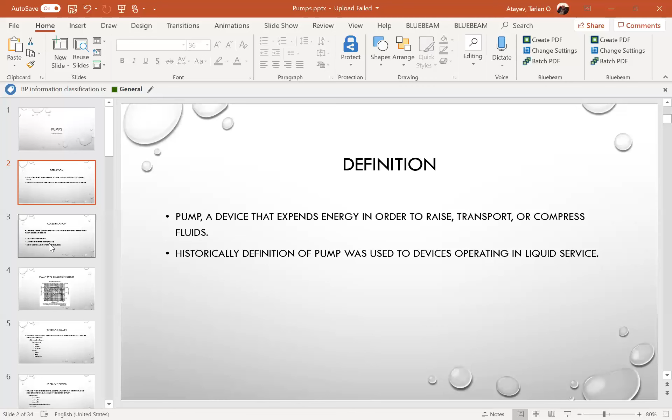General classification of the pump. The pumps are generally classified into three methods, mainly based on how energy is provided to the liquid.

One of them is volumetric displacement. Another one is addition of kinetic energy. And the third one is use of electromagnetic force, for ionized liquids. We will not be discussing this third method because I've got limited knowledge, and actually it's very specific stuff.

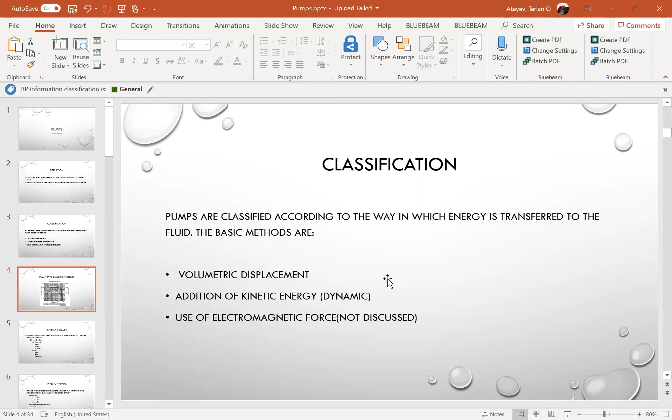Before going into the types of pumps, for the detail on the first two methods of energy provided, I would like to show you the pump selection chart. It shows dependence on head and capacity.

This is main stuff, because during interviews, I'm asking how you would choose a pump - what type of pump needs to be installed. Each company, each technical book is different, because pump selection is not very easy. There are so many factors affecting the pump selection.

It's usually not very easy, but this is just something like a starting point for pump selection and pump system design.

This is a pump chart. Again, different companies and different books provide different charts. From this chart, you will see that for higher flow and lower pressures, usually centrifugal pumps are used. And for higher head but lower flows, multi-cylinder plunger, positive displacement pumps are used.

But this is not a must, because I know a lot of centrifugal pumps which operate at high head and low flow sections, and backwards there are a lot of positive displacement pumps which run at low head but high flow. These are special cases, not standard cases.

There is some selection carried out by the companies themselves, so it's just the willingness of the companies who are installing the pump. But generally, these charts are perfect for initially identifying what pump you would like to use.

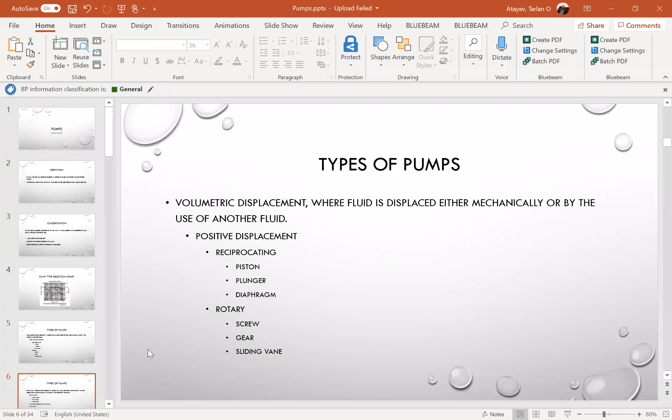And at the same time, dynamic pumps are ones where kinetic energy is added either by rotating at high speed or by providing impulse in the direction of the flow. There are three main types of pumps. One of them is centrifugal, which includes radial flow, axial flow, and mixed flow, and many others as well. It's not limited to this one.

And peripheral regenerative turbine pumps - there is very limited use of these. Usually they can be used as positive displacement pumps because they generate quite high head and very small flows. But actually their use is very limited, so you will not be finding a lot of stuff around, and they are not very widely used.

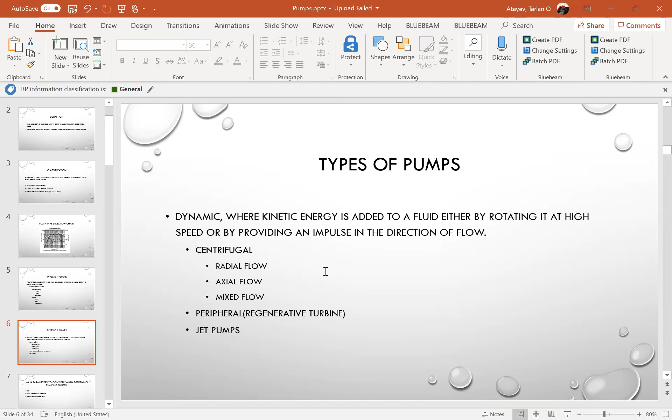And the last one is jet pump. Jet pump is sometimes classified as a third type of pump. I will be giving some tips around jet pumps. I will not be touching too deep, but I will give some information about these pumps as well.

When you are starting to design the pump, the first thing that should come to you, and actually the easiest choice, is centrifugal pumps. They're quite robust, very widely available. They can be designed in various ways, applied to high pressures, applied to small flows. There are high-speed pumps, low-speed pumps. Any type of centrifugal pump is available in the market you can use, and it's the beauty of centrifugal pumps that they are very well known and very well designed - there is a lot of knowledge behind these pumps.

Let's say, for example, there are high-speed centrifugal pumps running with very low NPSH. Especially in Azerbaijan - currently it's changing, but previously there were water injection pumps installed on platforms. In Azerbaijan was the biggest in the world - the biggest centrifugal pumps installed in the world, not only in size but in terms of pressure, because it was used for water injection into the reservoir, and in terms of volume as well.

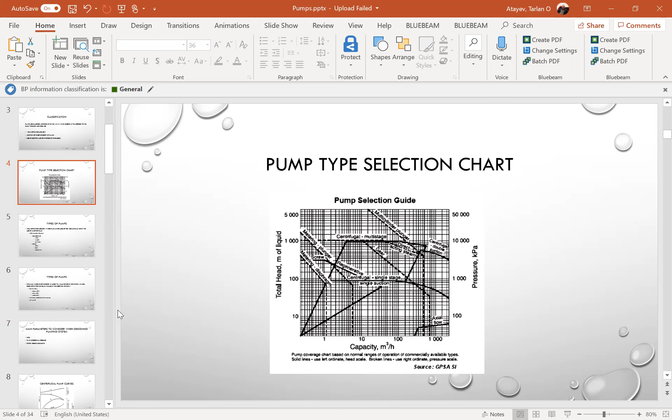And when you are starting designing, you should start from the system resistance curve. Just - what head do you need? For example, differential pressure head - what head do you need to pump liquid from one separator to another, from one equipment to another? What's the distance between them? You are putting the line, you choose the place where you put the pump, and when you are putting the line, you will see what the system resistance on the pump is.

How much head do you need to pump this liquid from one point to another point? The curve is dependent on what flow you are putting. For example, at 10 cubic meters, head of 20 meters is required, and at 100 you need something like 25 meters required. You put this curve, and according to this curve, you start designing the pump.

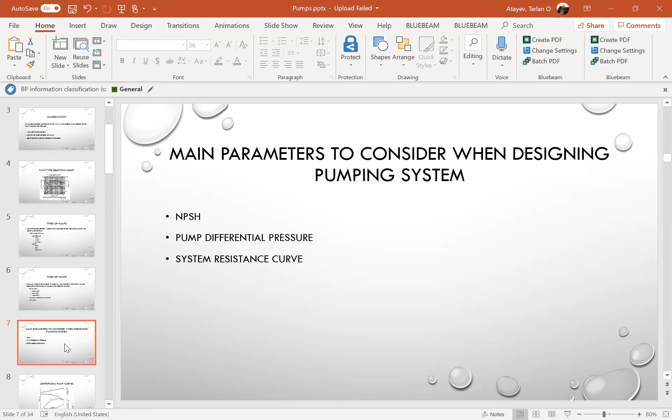Unfortunately, I don't have all my information, all my books, all my notes, papers are left in the office, and I just use everything which is in this presentation that I took from the internet. To be honest, the internet is not a great place to get this. It is a great place, but I was struggling to get the information which I wanted to share with you. But some of it will be appearing in this presentation.

Again, I would like to inform, because it's traditional stuff, it's something like scientific. Traditionally, pumps were designed with all formulas referring to water, and when the pump design is completed, the pumps are usually tested at the factory, and the widest available and most easy liquid is water. So all curves which you can see from the pump manufacturer are based on water.

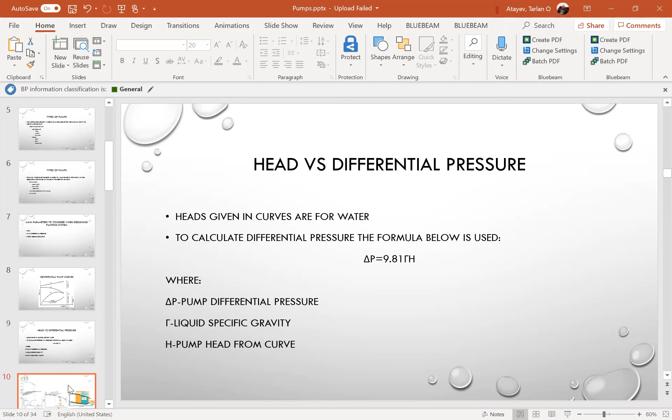Now I'd like to go to, let me check 2 presentations. Recently, I wasn't asked, but I was discussing with another process engineer, how is it correctly and properly right to start and operate the pump.

On the pump curve, you will notice a lot of enormous information. Let me go a little bit back for the NPSH. One of the main things is NPSH required. NPSH required is a head required for the pump for proper operation, mainly to prevent cavitation.

Why does the preferred operating range matter? Because there is an allowable operating range and a preferred operating range. What's the difference between allowed and preferred?

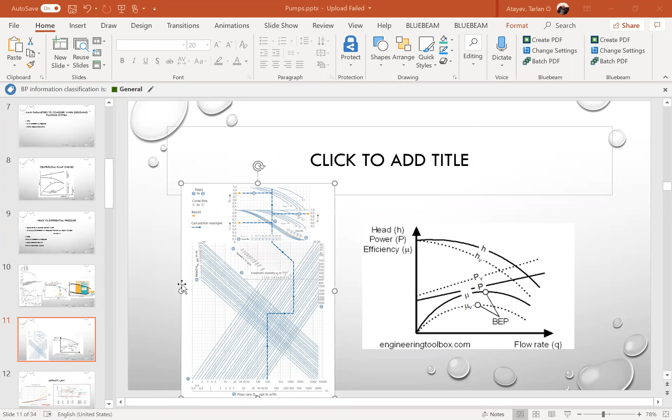Affinity law - it's one of the main topics. Generally I would like to go on. Let me return to this slide. Just a few days ago I was discussing with another process engineer the possibility of starting and

stopping the pump with the discharge valve closed. Generally there is no problem - a lot of companies do this, they just don't have a minimum recycle flow on it, and they're just closing the discharge valve of the pump. They start the pump, and later they open the discharge valve. Same during the stop - they close the discharge valve and stop the pump. But this is really not a preferable case.

There is no big problem, it will not damage your pump, because your pump will only be running for a few seconds, let's say 20 to 30 seconds, with a closed discharge valve. But actually you can put your pump in the low flow cavitation area, and this will reduce your pump life dramatically.

So in any case, it's better to start the pump with the recycle valve open, to adjust the flow to the preferred minimum limit of the preferred operating range, and later start the forward flow. This is something which came to my mind, and I wanted to share this case with you.

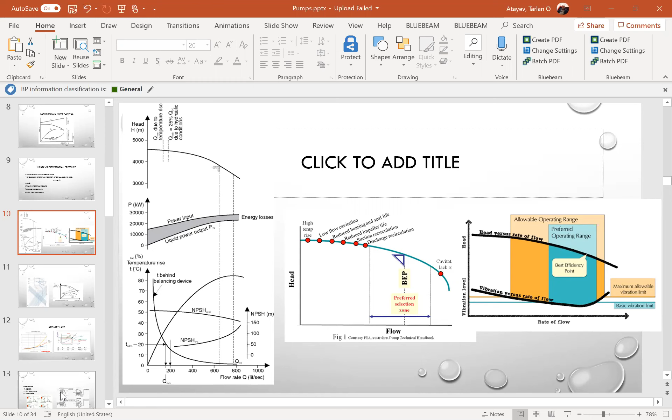Pump control - I would like to speak about pump control. There are 4 main methods. There are a lot of methods for pump control, but actually 4 main methods.

So we're calculating for the suction pump, not for the whole process? No, we're calculating for the pump itself - we're calculating for the whole process. We're calculating the head of the pump, and how much the performance of the pump due to viscosity will be slightly different, including the system resistance curve as well.

Pumps are controlled in 4 basic methods. There is another one - there is an enormous amount of valve control stuff, but the main one is throttling. A throttling valve is usually installed on the pump discharge, and you can just close or open the valve slightly more or slightly less.

And this is most efficient - no, I'm wrong, it's not very efficient, but actually this is a simple and, as they say, easy solution for them. In efficiency it's better than bypassing, but actually this again should be avoidable. This throttling is very widely used in refineries, and actually in offshore and onshore, upstream and midstream as well, but refineries use throttling very widely.

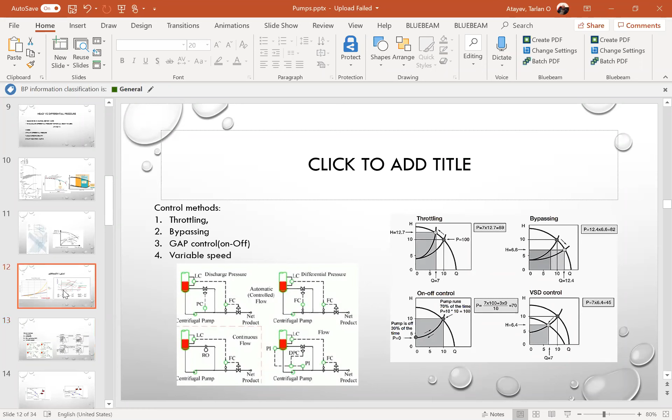This is well-investigated and well-known. When checking the performance of the pump, you should take into account the speed at which it currently rotates.

Another thing - for predicting, for example, if you're going to increase the speed of the pump, you can predict what your curve will be.

Sometimes you need to modify the pumps, and there are similar curves for different impellers, because pumps are fairly standard - companies provide one casing with 3 possible sets of impellers, and you provide your process data to them, and they choose the impeller required for your needs.

But generally, the affinity law duplicates this impeller function, and the easiest solution is to change the speed of the pump. In some cases it's too difficult, in others it's possible - for example, on one of the platforms, there is a pump.

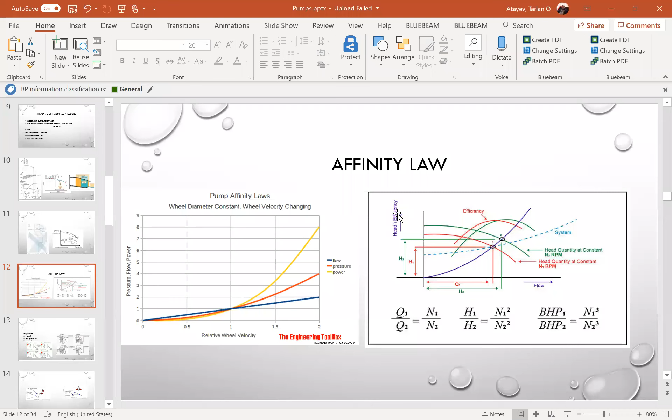Another thing you'll face quite often is pump design as parallel and series.

Series is just something like pump, booster pump, suction and main pump. And actually, the main reason is just to twice increase the pressure head.

What is the real requirement for we can design one pump, for example, instead of 2 single impeller pumps, we can have one two-impeller pump. So why do we need to do this? But in some cases, there are two process parameters controlled - suction pressure, for example. One pump is running to keep exactly the same suction pressure to not overcome NPSH, and another pump is running to cover discharge conditions, what pressure is required for the discharge line. In this case, sometimes you need physically two pumps with physically different impellers running on different process conditions.

In parallel - parallel is just physically for cases when you need, for example, 100 cubic meters, and instead of putting one pump, it would be better to put two pumps running in parallel. The main reason why is it so? For flexibility of the system.

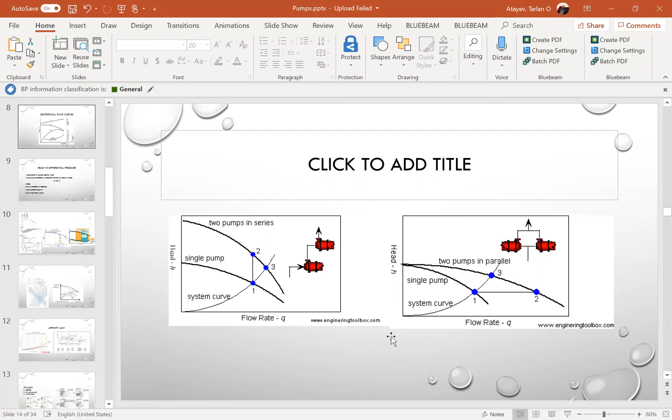NPSH, I would like to return to this - I didn't catch this a lot, I think. NPSH is just the head required for the pump to operate. But the company who is installing it wants to be sure, and there is another expression called NPSH available.

Different companies treat this function very differently, as much as they can. Even BP company used to change their philosophy from one to another. For example, some companies just add to this head another 2 meters. Some companies add 10%. Some companies add even 15% more than NPSH required. And even BP company changed this philosophy.

Your available head should be above this NPSH required at any process condition, any flow. For example, for this pump, your available head should be slightly higher than required, at least 2 meters. The rule of thumb is just 2 meters, and many companies are using this one - 2 meters. Currently BP is using 10% of the NPSH required, but I'm not sure because it's changing so quickly - I used to read the BP standards quite a long time ago.

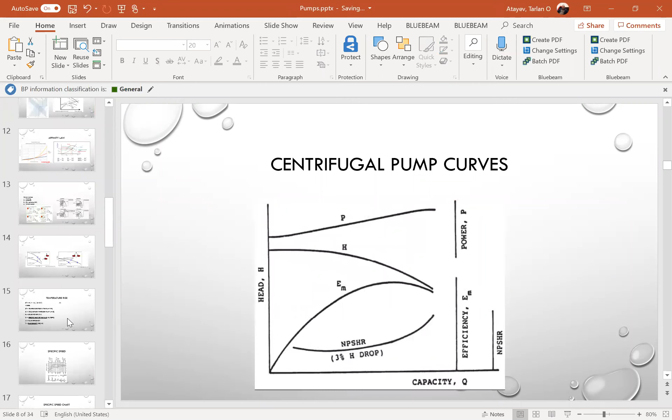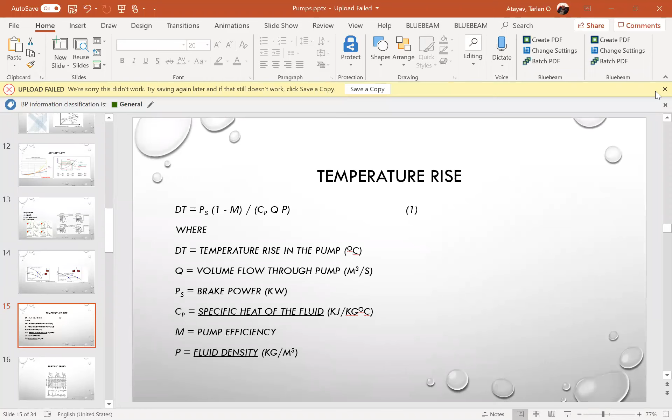Sometimes the pump adds some temperature, and especially when there's a recycle, it can go over the vapor pressure of the liquid. This is not a very rare case. It might be quite a real case, because especially with unstabilized oil coming in, it should be stabilized so the vapor pressure is equal to the pressure in the suction separator. But sometimes when the recycle turns back to the suction line and it's much hotter than the separator liquid oil because of the recycle, or even just slightly higher, it can raise the vapor pressure of the liquid and the pump will start to cavitate.

When we were specifying the process data, we specified the seawater temperature as 6 degrees C. It goes through the valve and discharges, keeping the same temperature of 6 degrees C. We did correction for the negative pressure on the discharge of the valve because it's going down the line. But even after this, we saw cavitation of the control valve. When we investigated, we identified that due to inefficiency, the temperature of the water was increasing the vapor pressure of the water going through the control valve, causing cavitation in the control valve.

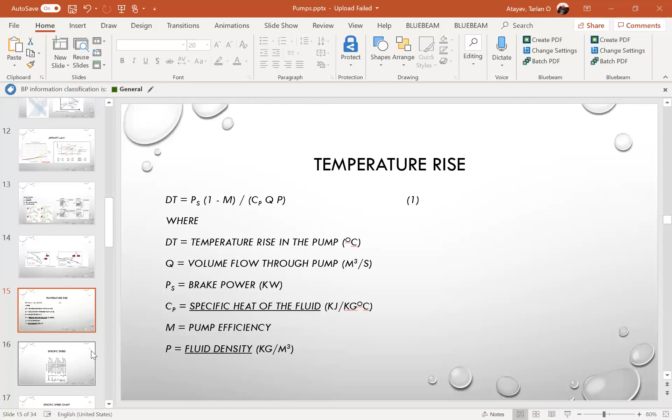Next thing I would like to discuss is specific speed. Why do we need specific speed? It's quite nice stuff, it will help you not only in designing the pump system but also in modifying the pump. Let me complete this specific speed topic, and after this I will go to the question - I think I won't be going far from the question. Specific speed and specific diameter came from the American Institute, and Europe is trying to minimize its use as much as possible. If you go to the UK, they use specific speed, but specific diameter is used very rarely. What's the beauty of specific speed, and what does it indicate? Generally, it indicates the shape of the impeller.

If it's a long impeller, it will be creating higher pressure, but flow will be restricted, and specific speed will be much, much smaller. And if you go backwards, your specific speed is too high, this means your pump is running in axial flow position as well.

What's the beauty of the specific speed? There is some kind of operation called cutting the impeller. You order the pump and install it, but the pump generates too high pressure on the discharge, or your process conditions change and you don't need this high pressure, but you need more flow. You cannot provide this. What is usually done? The impeller is cut circumferentially, and the length of the passage is reduced.

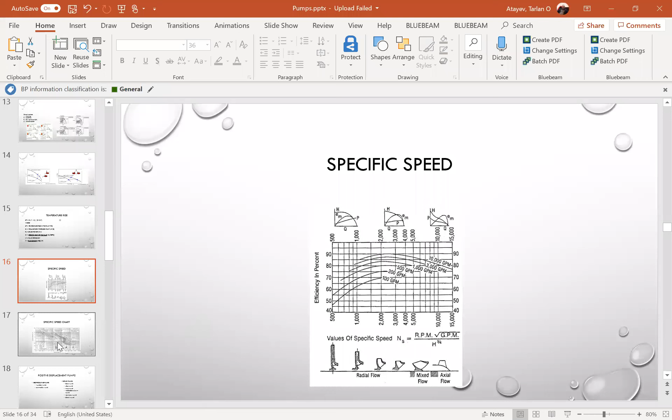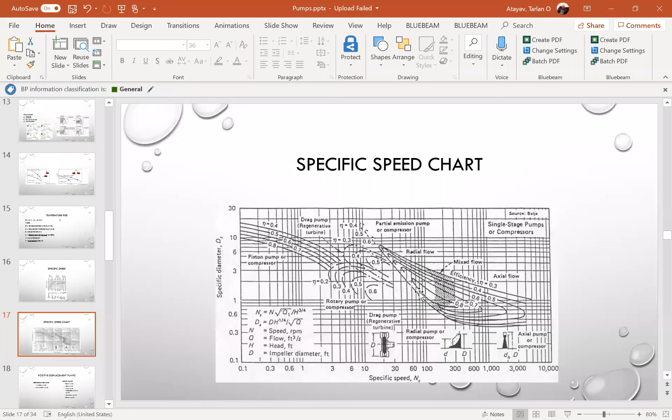There is a rule of thumb of 500, and it's shown there as well. If your specific speed is below 500, there is no centrifugal pump that can be useful for you - it needs to be a positive displacement pump. Still, a lot of companies are violating these kinds of rules, using centrifugal pumps for specific speed lesser than 500, and positive displacement pumps for specific speed higher than that. I don't want to stay on this topic too much.

Let's go to positive displacement pumps.

Positive displacement pump is an alternative to centrifugal pumps. It's more ancient, developed before centrifugal pumps, and to be honest, less robust. The problem is they are more expensive and need continuous maintenance. They are not as robust as centrifugal pumps, but honestly they're not as unreliable as technical information suggests. If you compare positive displacement and centrifugal pump reliability, there's supposedly a big problem, but actually the difference isn't very big. Positive displacement pumps require slightly higher amount of people and resources to maintain compared to centrifugal pumps.

Previously I stated two main subgroups of positive displacement pumps. I was saying piston pump, but actually here I give only plunger and diaphragm pump. For rotary pumps, there is a wide range - gear pumps, lobe pumps, vane pumps, progressive cavity pumps, screw pumps, and so on.

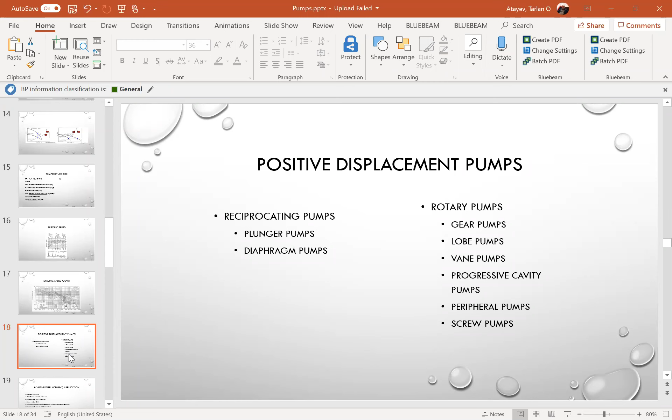What's the beauty of the positive displacement pump? There are some applications where you should decide to use positive displacement pump. There was one question about viscosity - which pump would you prefer for viscosity? For variable viscosity, what I mean is, for example, lube-oil systems for pumps including centrifugal pumps - they mainly use positive displacement pumps, because they operate when the lube oil is stored in one tank exposed to ambient temperature.

Temperature of the lube oil is affected by ambient temperature and by pump operation. It might be running on high load or low load, and the lube oil will be affected - lube oil temperature will change.

For example, in turbines there is a mineral oil or synthetic oil system which is pumped into the bearing of the turbine itself, and depending on the load of the turbine, the temperature of the synthetic oil changes. Because of the changing temperature, the viscosity of the oil also changes, but you need to provide constant flow at changing viscosity.

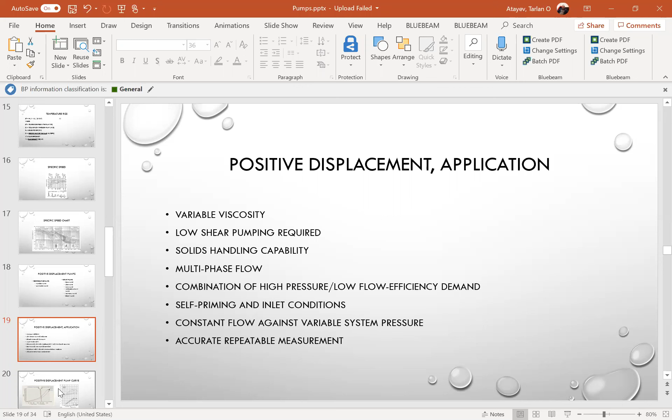Here I can show you the real beauty of the positive displacement pump: its operation is very negligibly affected by viscosity. In most cases it's totally ignored. There's only pressure drop across the inlet and outlet valves, and some losses due to viscosity change. That's why for higher viscosity applications, positive displacement pumps are preferred. If your pump needs to handle high or low viscosity changes, its flow will be negligibly different.

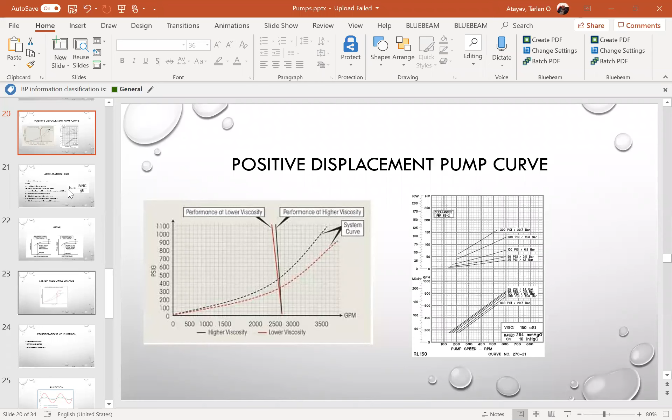One of the main things to consider when designing a positive displacement pump is the acceleration head. There's a formula required for NPSH available, and the main factor there is acceleration head. If you use exactly the same formula for a centrifugal pump and a positive displacement pump, there will be one problem: acceleration head. It should also be considered when calculating NPSH for the positive displacement pump.

Acceleration head generally occurs because positive displacement pumps pump one stroke of flow, then stop and take in liquid from the suction, then pump again. During this change in direction of flow, the whole system resists the flow change. Acceleration head is essentially the resistance of the system to this flow change, not the flow change itself. Let's see what the pressure is.

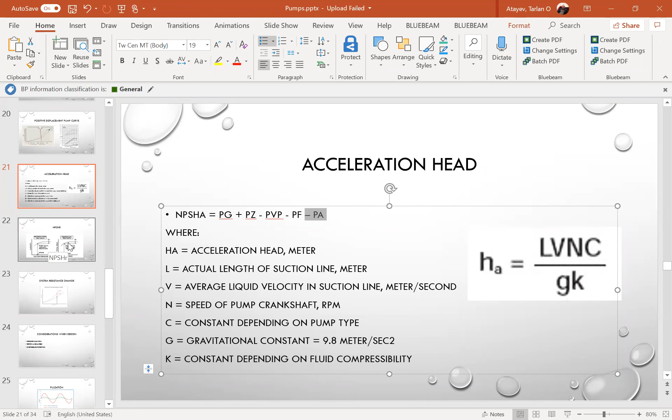Generally, the pump test is done in a loop. The pump is installed in the middle, pumps water from the discharge back to the suction, and there is a line connected to the suction tank. But the recirculation is not done through the tank, it's done through the pump discharge straight to the line and just connected to the suction tank, and the suction tank is just providing suction pressure, suction head.

Why is it done so? Mainly for efficiency calculation, because when it's pumping through the pump, the temperature at the pump discharge and the temperature at the pump suction are measured, and energy losses are calculated from the temperature. If it's done through the tank, there will be more dissipation, energy dissipation, and it will be slightly difficult to calculate.

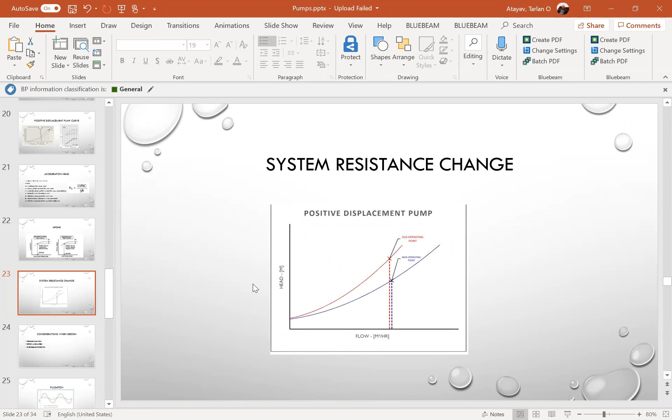The main thing you should consider when designing a positive displacement pump is pressure pulsation. As previously mentioned, pressure pulsation is very common for positive displacement pumps. I will be explaining about performance, speed, and overpressure protection.

For overpressure protection, for a centrifugal pump, you can design the pump head as much as you want. For example, if your system is designed for 10 bar G, you can design the pump with a discharge pressure on the dead head of 9 bar G. There's no problem, and you can be sure your pump will never go over the design pressure of the system.

Positive displacement pumps are slightly different. They will definitely cause overpressure in any case, no matter what the suction or discharge pressure is. If you close a discharge valve, or something happens on the discharge valve, you will be rupturing everything - starting from the pump seal, the pump discharge lines, everything. You need to consider overpressure protection for positive displacement pumps.

There was one case when a positive displacement pump was installed for very viscous vacuum residue, which was pumping from one refinery to another chemical plant. This vacuum residue, I think it was somewhere in the UK - I don't remember exactly - and a positive displacement pump was installed.

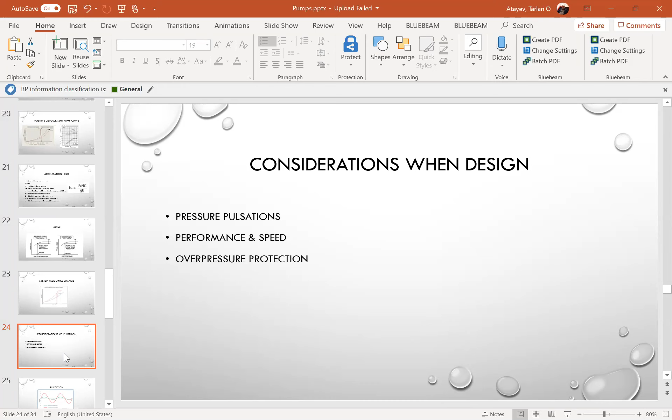Ideally, you can design the system with minimal pressure pulsation for the positive displacement pump. If your lines are wide enough, resistance to flow change is small, so NPSH acceleration head is small, and pulsation will not be great. For example, in a lube oil system for pumps, compressors, and turbines, there's no pulsation because the line is too big for the pump delivery - it delivers 2-3 cubic meters per hour through 4 to 6-inch lines, so pulsation is minimized.

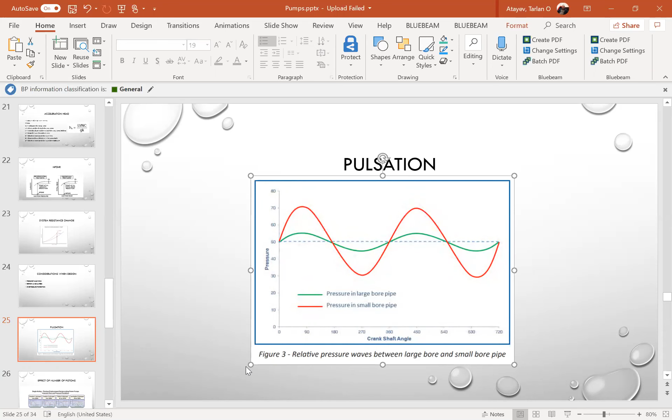Also, if the loop is too short, that minimizes it too. But if you put a small bore line, you will definitely have pulsation. Pulsation mainly depends on how many heads the pump has, or how many screw sections in screw pumps, or how many teeth sections or isolated volume sections in your gear pump.

For a simple reciprocating pump, single acting, for each 360 degree rotation, the flow will increase then drop at the end of half the rotation. In the next half rotation, no flow moves forward and the pump will be sucking flow from the suction. This is the flow change within the pump. Of course, if you put 2 cylinders, 2 pistons, the flow frequency will double. And if you put 3 cylinders, your flow fluctuation will be much, much less.

But for each stage, it will be exactly the same pattern. If you go further with 5 plungers, your fluctuation will be even less. So ideally you can minimize your pulsation as much as possible to a negligible case. But in any case, a lot of companies, even with 5 plunger pumps, 6 plunger pumps, 8 plunger pumps, they still use a pulsation dampener.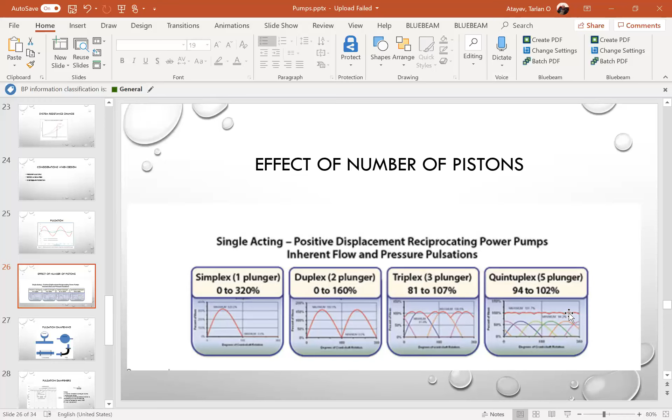As I said, there are 4 methods of pulsation dampening. If you properly design the lines - make them big - and reduce the acceleration head as much as possible, your pulsation will be minimal. With 5 plunger pumps and more, it will be very negligible. But if not, for example a metering pump with only 1 head, this pulsation is unavoidable.

The equipment called bladder or pulsation dampener is usually used. What is it? It's just a small metal vessel filled with nitrogen. Nitrogen is preferred because its compression is constant across a very wide range of temperatures and pressures, so nitrogen is preferable, and the vessel is filled with it.

When your pump starts pumping, the pressure in the vessel - depending on how you calculate it - but the rule of thumb and industry-wide technique is just 80% of the pump discharge pressure. For example, if your pump discharge pressure is 10 bar G, the nitrogen in the bladder when the pump is not running should be 8 bar G. When the pump starts, pressure increases until the nitrogen is squeezed, and further fluctuations are taken up by the nitrogen, which compresses and discharges between strokes, minimizing the pulsation. It cannot take the whole pulsation because it also acts as a pump itself.

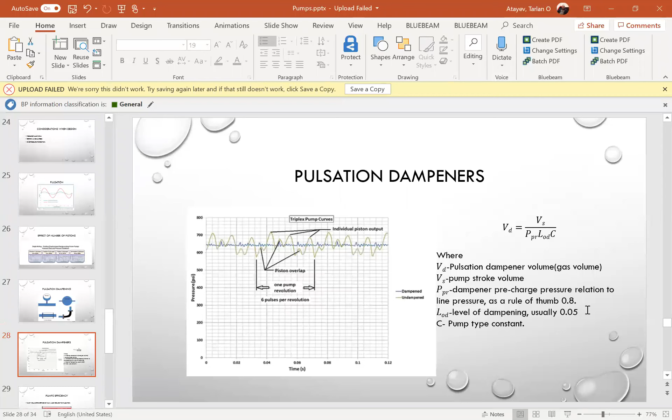The pump constant type is just standard, all standards. This is for the number of plungers - for example, one type of pump has, I think, 7 constant. They're also widely available on the internet in the standards, you can find this in all standards, it's available and you can use these figures. This changes mainly by the number of pistons - for one piston it's something like 1.8, I don't remember, 1.5. For 3 pistons or 5, it's even more, I don't remember exactly, something like this, and you can design from there.

Now I would like to go back to the resonator. There is one negative aspect about bladders and one positive aspect for the resonator.

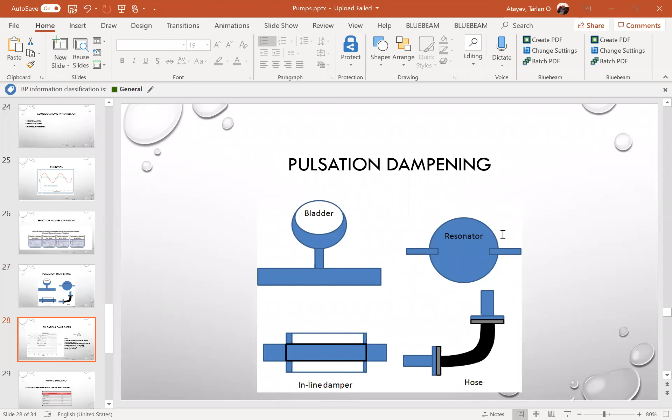As you see here, the dampener pre-charge temperature pressure, and the dampener pre-charge pressure, depend on the pump discharge pressure. When you change the discharge pressure, your dampener pre-charge pressure becomes obsolete - it will not survive. You can design the bladder system only for one particular pressure, plus or minus 10%. Okay, it can change, it will survive in some range, but if you go below or higher than that pressure range, you need to design a new bladder.

For pumps with a changing resistance curve, this is quite important. Whereas for changing speed pumps or changing volume pumps, it's just a disaster. But the resonator doesn't have this negative effect - the resonator can help you dampen pulsation at any pressure, any flow, anything. They are a little bit more expensive, but the beauty of the resonator is that they can work across a wide range of operating conditions.

I would like to answer the question, and after this we'll move on. Oh, nice question, very nice question.

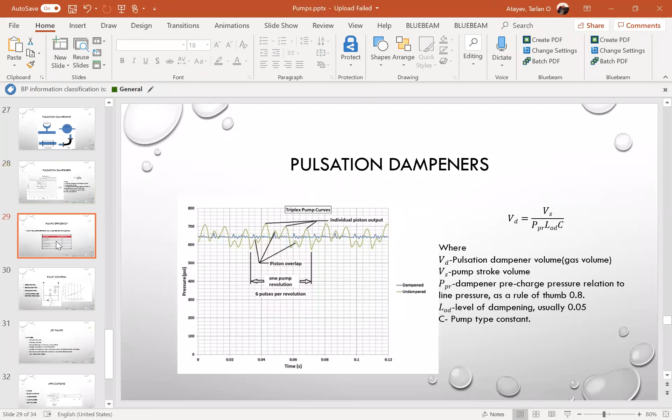Another thing is pump efficiency. Pump efficiency depends on the valves, suction valves and discharge valves. If the discharge and suction valves are operating perfectly, it will dramatically reduce the pulsation. It depends - as high as your pump efficiency, as good as your system is in terms of pulsation.

For example, in the table I've given average efficiency of the pump - for example internal gear 90, 85. For vane, radial piston, bent axis piston, axial piston, it's just 90, 91, 92%, and actually some are less.

For example, I know that for radial piston, it's the same piston type, but the pistons - I don't know how to explain - if you've seen the airplanes of World War I, they were installed with radial motors in front of the planes. These radial piston pumps are exactly the same copy of that kind of motor. In radial piston pumps, nobody puts any pulsation dampeners - not because of the type, but mainly because of the number of pistons. The number of pistons is so large, it might be 16 pistons, so the fluctuations are really small.

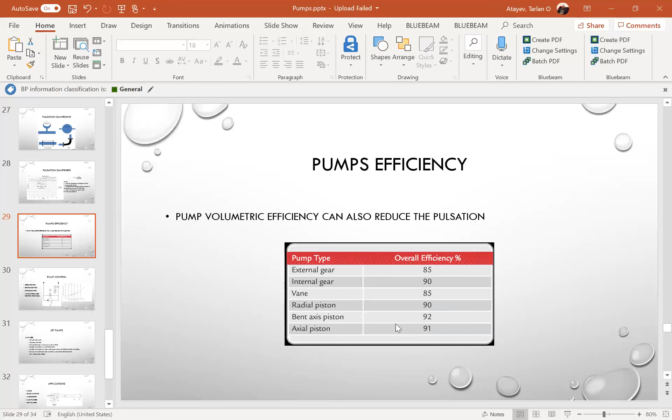Pump control. How are we controlling the positive displacement pump? There are three main types... actually, there are four main types. I will speak of speed control. Speed control can be done in two cases.

One of them is in terms of centrifugal pumps, by changing the frequency of the motor and changing the speed of the pump. Do you have any questions before going? No, okay. And when you are changing the speed of the motor, the speed of the pump is changing.

But again, be aware of your bladders. Bladders need to be, every time you change them, redesigned or rechecked. Another thing about speed change: majority, mainly 99% of positive displacement pumps, have a belt between the motor and pump. You can easily change the belt pulleys and change the speed ratio between motor and pump, changing the speed of the pump at any time you'd like.

Another method of controlling is the flow back or spill back line, bypass line, recycle line, however you'd like to call it. In this case it controls the flow on the discharge, but actually it can be any other process parameter. It can be level in the column or tank. It can be pressure on the discharge or pressure in the system where it's pumping. It can be any of them. And actually this is widely used, and this is the most

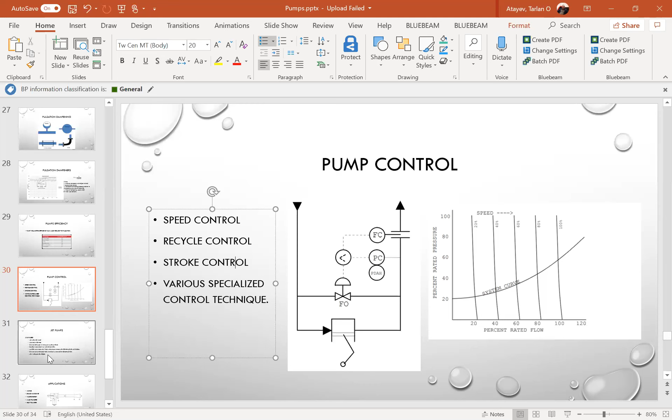That's it for the positive displacement pump. I would like to give very short information about jet pumps, only 4 slides. Jet pumps, I've got some negative stuff to say.

It's one of the greatest pumps. It has a very big advantage. It's the cheapest pump, and you can buy one for $150. It has no moving parts. It can work maintenance free for the length of its life, 50 years.

There's no change, there's no maintenance. It can be installed whenever you want. It doesn't cavitate, it doesn't need special NPSH requirements, it doesn't need anything. Very robust pump. To put it into operation, there's no special procedure, just open the valve and put flow through the pump, nothing.

As for materials of construction: in terms of centrifugal and positive displacement pumps, there is continuous movement inside, friction between two units. So some materials are not appropriate for positive displacement pumps, and some materials are not appropriate for centrifugal pumps. But for jet pumps, any material can be used, especially things like ceramic. This is the greatest advantage of jet pumps.

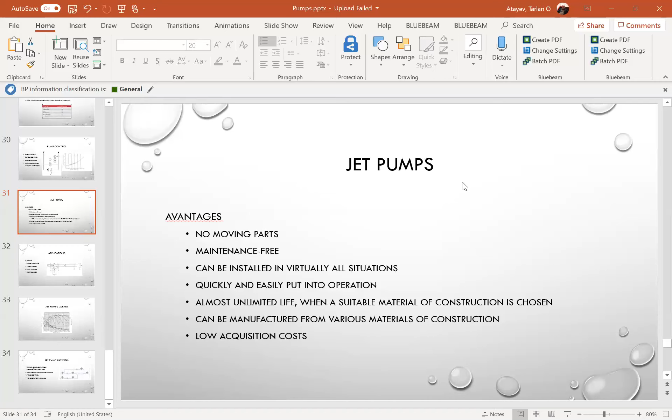Jet pumps usually use a venturi tube for mixing, solid handling, and waste energy use. It's very nice for waste energy applications.

Two more uses: mass transfer and heat transfer. More and more jet pumps are used for these. For example, in glycol contactors, glycol is taken from the bottom cone of the contactor in some designs and recycled back to the cone. Triethylene glycol and the incoming gas are mixed and pumped back to the cone, reducing the water content of the gas. They're very nice for mass transfer, and there are many other cases, for example dissolving natrium salts of naphthenic acids from diesel in water. They can use this, and they're very widely used.

The same applies for heat transfer, when one gas, not liquid, provides heat to another liquid to vaporize it or drop down some liquids. It's more related to gas, but it can be used for liquid as well.

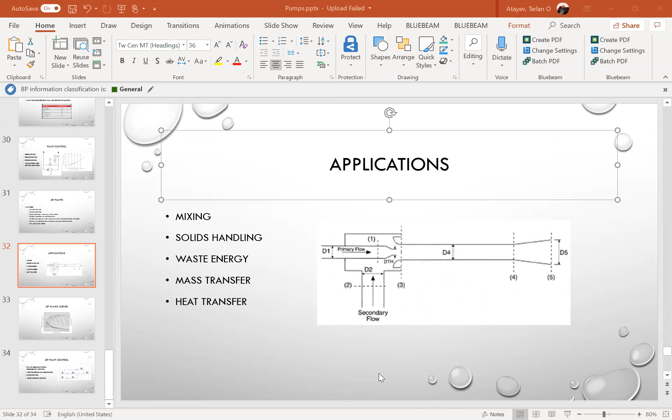Before going to another slide, I'd like to answer the question here. No, actually jet pumps are used, even on offshore platforms and refineries—they're very widely used. You'll find a lot of them. They're not as obvious as centrifugal and positive displacement pumps, but they are used.

Now the main answer to your question: efficiency. These pumps are very low efficiency—it very hardly goes above 25-26%. That's the main stopper for this kind of pump. Generally, you are using the power of another stream, and that stream needs to be conditioned before use. Its efficiency primarily depends on the head of the initial liquid, the head of the second liquid, and the proportional rate between the primary and secondary liquids.

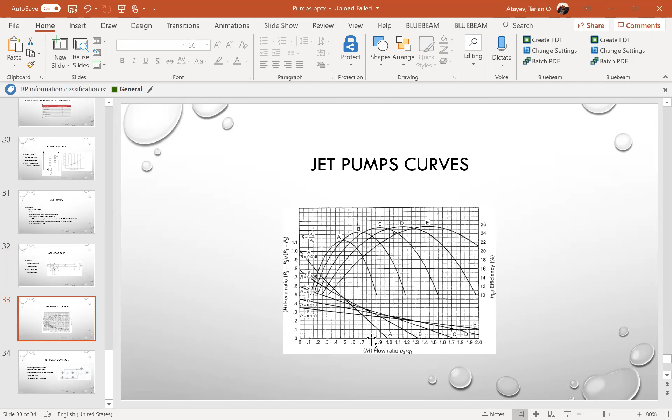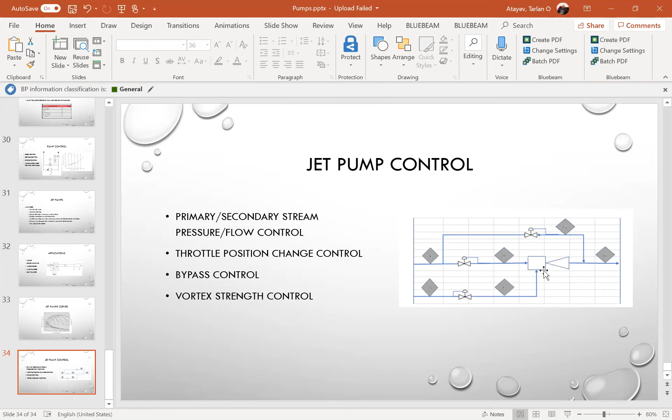Jet pump control is also very easy. There are various methods, and this is just about the sophistication of the controls. Usually it's controlled only by the primary liquid entering. Sometimes the secondary liquid is also controlled, and sometimes it's controlled only by the secondary liquid. Sometimes it's controlled by bypass, sometimes by throttle position change—there's an internal throttle, and by moving this throttle left and right you can change the pump performance a little. This is a more sophisticated method, used mainly for gases rather than pumps, but it's used for pumps too.

Vortex strength control is when the secondary liquid is not given straight away to the center—secondary liquid is given tangentially, creating a vortex inside and generally increasing efficiency. But this is also a very rare type of control and not widely used.

That's it, ladies and gents, that's it. I shared all what I knew about pumps and control. There are some other things as well, but we are limited in time, and I think I've provided quite an enormous amount of information and threads.